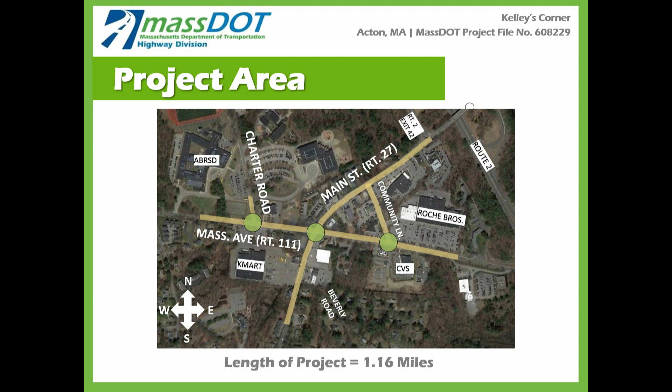So why is this project needed? To start, I'll briefly go over some of the existing issues, and then we can talk through the proposed improvements to address those issues.

Congestion and delays occur on Main Street and Mass Ave. The project area is located within a densely developed area containing commercial and retail properties, restaurants, banks, shopping plazas, a pharmacy, gas stations, as well as the Acton-Boxborough Regional School Complex, which contains several schools. All of these land uses result in a lot of local traffic. But given its proximity to Route 2, the project also has a significant amount of regional traffic, estimated to contribute approximately 80% of the traffic in the area.

Given this, it's no surprise that the high volume of traffic generated through these uses really results in a lot of congestion and delay in the project area.

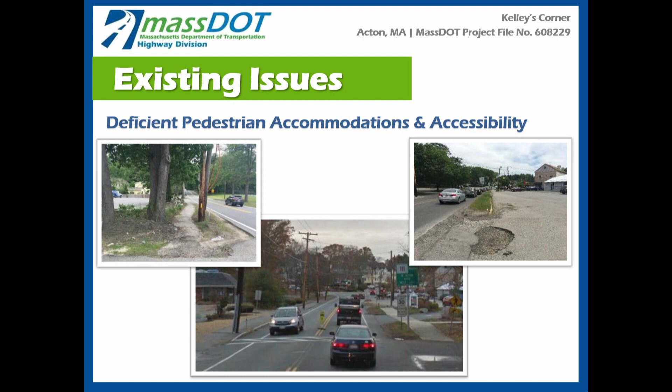There are very few bicycle accommodations within the project area, and those that exist don't meet policies or design guidance. Dedicated bicycle facilities aren't provided throughout the project limits, pavement markings are inconsistent, and safe intersection crossings are also not provided.

Poor access and curb cut management—what we mean here relates to driveways. Given the high quantity of commercial, retail, and residential uses within the project area, there are a lot of driveways within these high traffic volume areas.

Driveway widths are inconsistent, contributing to both driver and pedestrian confusion. Several driveways are much wider than necessary, with no consistent widths or crossing areas, creating a hazard for pedestrians, vehicles, and bicyclists. The high quantity of driveways also contributes to traffic congestion and delays, where turning vehicles have no place to queue and wait for an opening in opposing traffic.

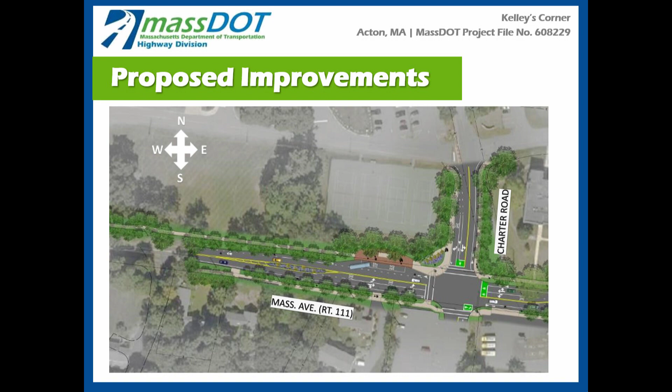This is an image if you're driving westbound on Mass Ave approaching Charter Road - you can see Charter Road coming in at kind of an angle. This is the existing condition, and we can look at a proposed rendering. You can see the dedicated left turn lane provided, as well as the through and shared right turn lane, the pedestrian accommodations, and the bicycle lane and bicycle box that we can discuss further.

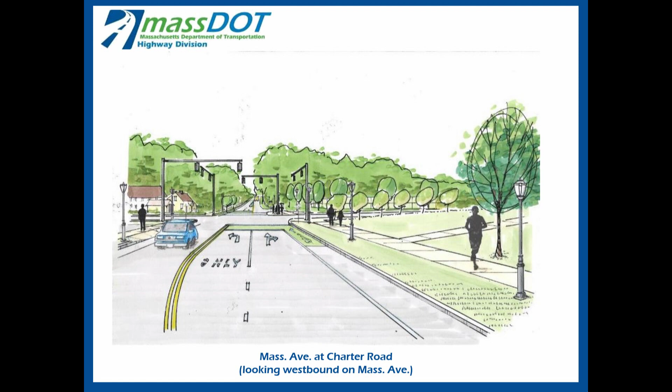Mass Ave westbound will consist of a left turn lane and a shared through right lane. Main Street northbound will consist of a dedicated left turn lane, a through lane, and a shared through right lane. Main Street southbound will have a dedicated right turn lane and a through lane.

Pedestrian crosswalks are provided on all approaches here, and the signals will include a dedicated pedestrian phase, meaning all of the crosswalks will be timed at the same time so everyone is crossing in each direction. These crossing times will be based on the standard 3.5 feet per second, and the crossing distance for all crosswalks will be timed based on the longest crosswalk at this intersection.

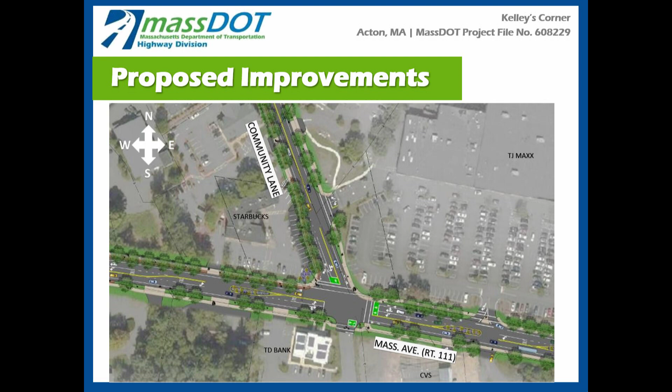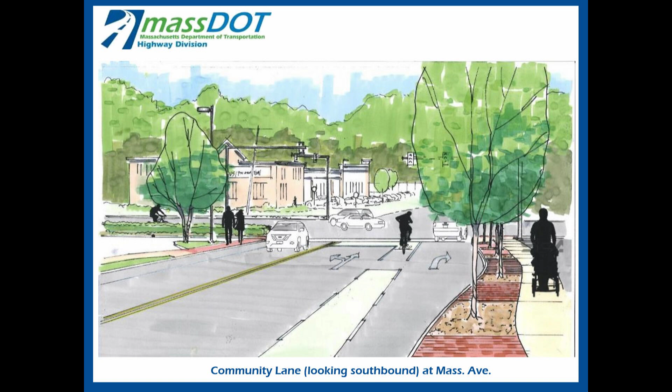Now we are looking at the existing condition on Community Lane, looking southbound toward Mass Ave. This is the existing condition, and here's a rendering of the proposed condition. You can see the dedicated right turn lane, the pedestrian sidewalks, and the separation from those, as well as some of the street trees that would be proposed.

Now we're switching to the north side of the Main Street Mass Ave intersection, looking at Main Street at the intersection with Community Lane. We just looked at the south end of Community Lane; this is the north end.

Community Lane northbound will operate as a right turn only at this location. Main Street southbound will include a dedicated left turn lane for vehicles turning onto Community Lane, and a through lane will allow those traveling southbound to continue without delay. I talked about the crosswalk provided there for pedestrian safety. You can see the sidewalks, the separation, the vegetated buffers, and the street trees at this location.

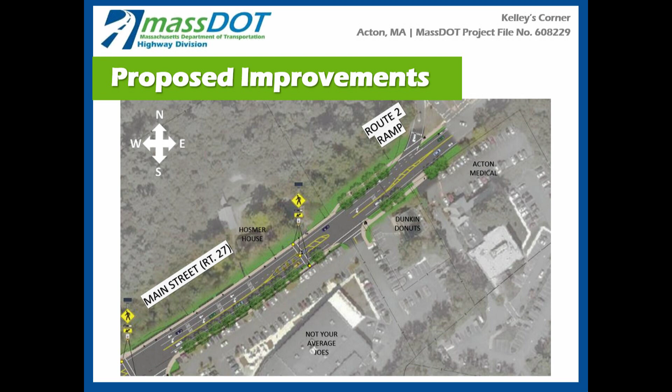So again, we'll look at another rendering. This is Main Street; you can see the Hosmer House on the right. This is southbound, just before you reach the Hosmer House. And this is a rendering of the proposed condition, showing the landscaped median, the sidewalks, and some of the streetscape there.

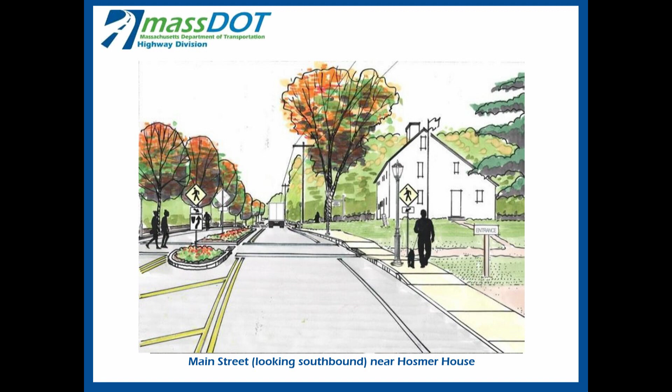A crosswalk with a rectangular rapid flashing beacon will be provided near the intersection with Beverly Road. That is an unsignalized intersection there.

Pedestrian accommodations include sidewalks on both sides of Main Street with a stamped cement concrete or vegetated buffer depending on the location and property constraints. Street trees will be provided where they can be accommodated in the buffer, and a landscape median is proposed at the most southern limits to welcome you into the Kelley's Corner area, consistent with the other four approaches to that intersection.

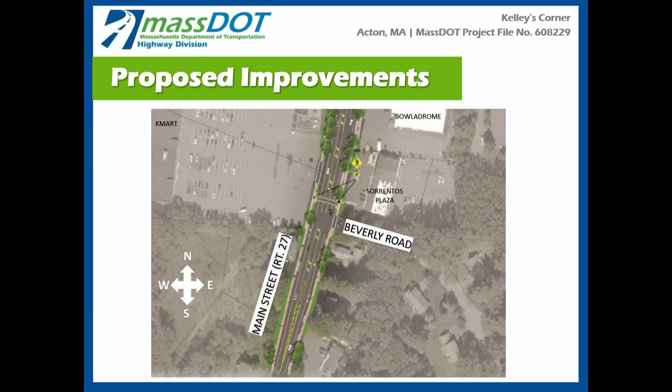So I'm going to pass this over to Rebecca. She's with GPI also, a traffic engineer, and she's going to go through how these proposed improvements at the Main Street Mass Ave intersection will improve congestion and delays through that intersection. It's a bit detailed, so bear with us here.

Thank you, Lindsay. Good evening. As Lindsay said, I am Rebecca Brown with GPI, a senior project manager working on traffic analysis. I'm going to walk you through a little bit of the traffic operations through the area that will result from the project, and what we see out there as operations today.

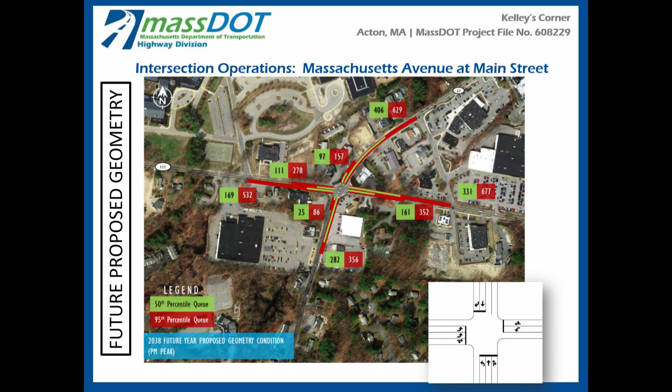So the issue is that this intersection is pretty much at capacity, and during the peak hours is actually operating over capacity. So if you start adding any growth to this intersection, the delays go up very significantly, very quickly. When we get out to our 2038 design year, we're looking at delays of approximately 107 seconds on average with the existing geometry and signal timings that are out here.

So the green line represents our proposed improvements. With the proposed improvements under an opening year condition, the overall intersection delay drops to 42 seconds. But what you see is that the maximum delays through the intersection drop significantly. As I mentioned, we're optimizing that intersection operation so that all of the approaches experience similar queues that won't back up into the adjacent intersections. So some of the movements will get slightly longer, some of them will get significantly better, but overall it will be about 42 seconds of delay per vehicle going through the intersection.

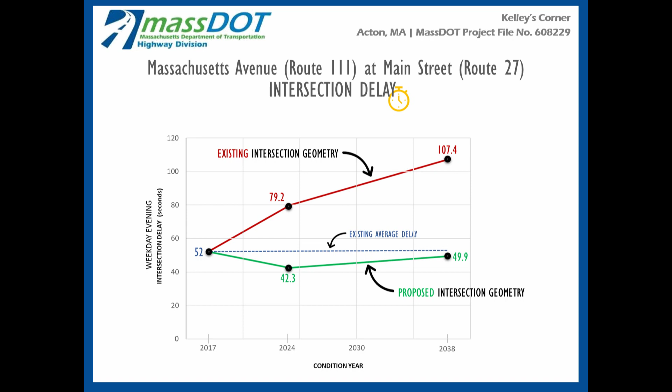That will cut the queues down significantly, and we'll still have excess capacity. This intersection will still be, in the 2038 condition, only operating at about 85% of its capacity. So we could still see some continued growth before we start to see that sharp peak you see with the red line in this graph.

One of the things Lindsay mentioned was that there are a series of rectangular rapid flashing beacons being proposed at a number of locations within the study area. These will be located at the intersection of Main Street and Community Lane, just north of the Hosmer House on Main Street, at the easterly end of Massachusetts Avenue near the Victor School, and on Main Street near Beverly Road — four locations where these will be placed.

What these signals do is really accentuate the crosswalk and draw the driver's attention to it. They have two flashing beacons on either side, and these signs are provided on both sides of the roadway to provide additional driver feedback. When a pedestrian presses the button, the lights will start flashing.

They will flash for a predetermined amount of time set based on how long it takes a pedestrian to cross that crosswalk, traveling at 3.5 feet per second. If desired, they can be set for a slower walking speed, particularly if it's anticipated there could be pedestrians walking slower at some crosswalks, or larger groups of pedestrians that could extend it. It will flash for a predetermined time to allow a pedestrian to cross the roadway.

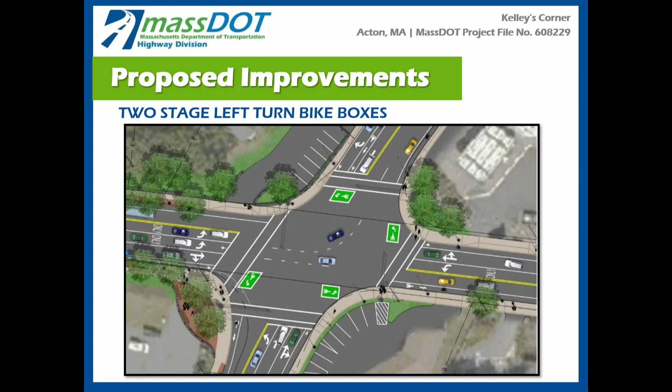So we've gone through all the proposed improvements, and one of the next questions is related to construction - how is traffic going to be affected?

Construction of this project is anticipated to begin around end of 2021 or start of 2022, with duration estimated at around 2 construction seasons, approximately 24 months. During this time, paving and roadway construction, as well as drainage and utility work, would be anticipated to occur during off-peak hours.

Roadside work that can be accommodated during regular construction hours will be, and potentially alternating traffic would be implemented if required. The idea during construction will be to limit impacts to abutters and businesses, maintain driveway accesses, and maintain pedestrian accesses throughout the project area during construction.

Before we get to construction, we should note we have a bit of environmental permitting to get through. This is the 25% design phase, so we have to carry this through into a final design, but before it goes into construction, we must file a series of environmental permits. I won't go into each, but they all have certain requirements and thresholds. We trigger many of these based on the project scope, as well as adjacency to environmental resource areas such as wetlands, and historic areas such as the Hosmer House. These are all part of the permitting requirements.